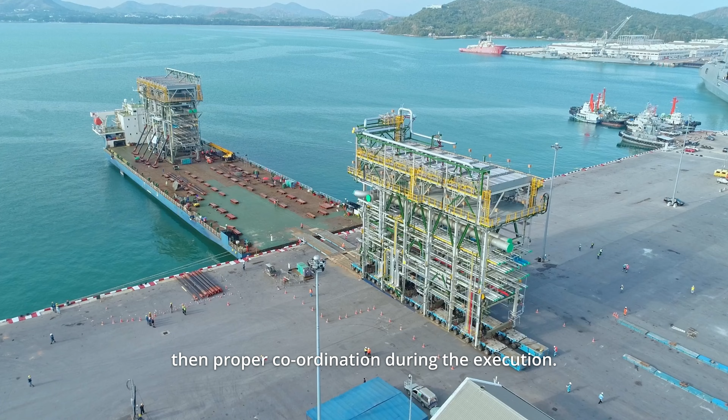Well, the expectations in regard to sea transportation are similar to any other discipline you work with. You are looking for proper planning to ensure smooth execution, then proper coordination during the execution. So we are a family. Everybody knows what they have to do, the scope of work, what to do precisely when the project comes, and then specifically for this project, where to pick up the work from one person to another.

I am Frederic Pagnès, the Managing Director of Dextra Industry Transport, which was created in 1992 in Thailand. At the beginning, we handled small projects such as power plants. Then, when the Thailand economy grew, we entered other sector activities such as petrochemical, sugar mill, paper mill, and so on. Later on, when Thai labor skills reached an international level, Thailand became a major export country.

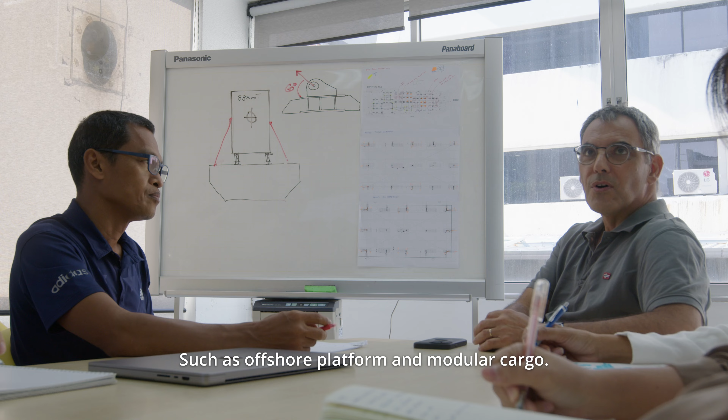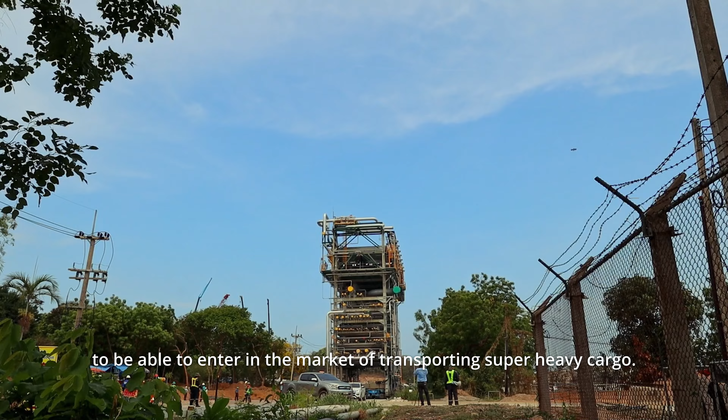Thailand was able to manufacture complicated equipment such as offshore platforms and modular cargo. This is the time that Dextra decided to open its own in-house engineering department to be able to enter the market of transporting super heavy cargo. In 2023, Dextra was acquired by Fracht Group of Switzerland, which has over 150 offices worldwide. Since they didn't have any offices in Thailand and Vietnam, where Dextra is present, it was a good combination.

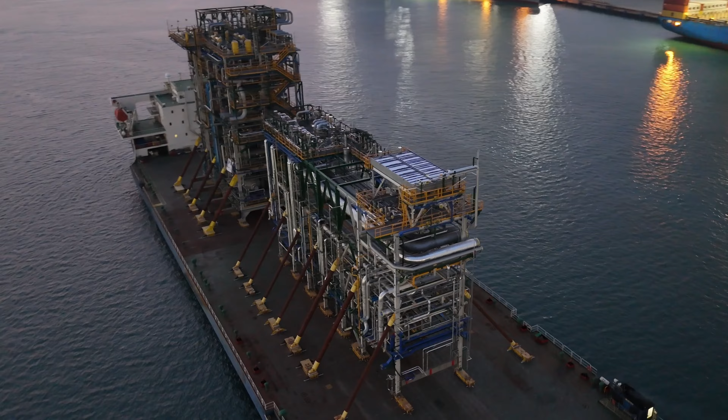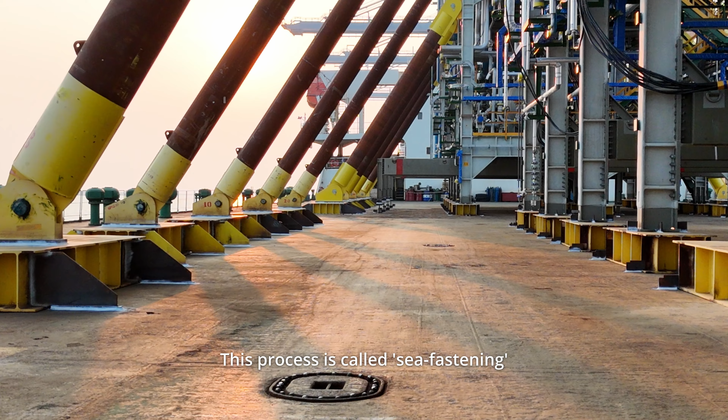For this major project, we had 73 modules to be shipped from Thailand from 2 different yards because the volume was so big that one yard can't fabricate everything. Because we transport them on the vessel, we had to find ways to secure them. This process is called sea fastening. So we had to work almost 1 year in advance before the first shipment.

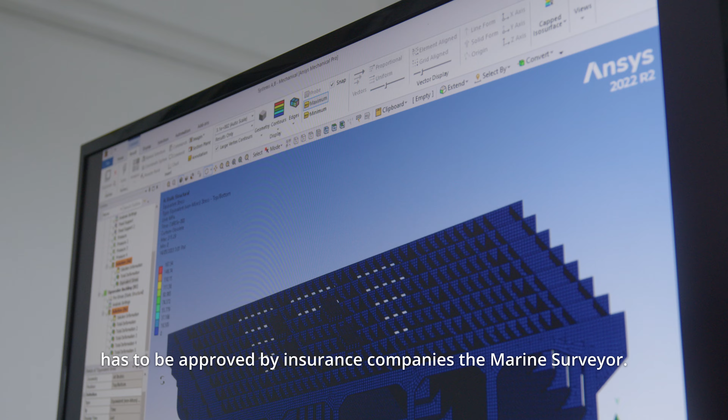There are 3 reasons behind that. The first reason is because the lead time to fabricate such elements is very long. It can take up to 5 to 6 months. So if you include engineering, you're already at around 10 months. The second reason is because everything we engineer has to be approved by insurance companies, the marine warranty surveyor, and also everything we do is as per international standards. So this takes quite some time to get approved.

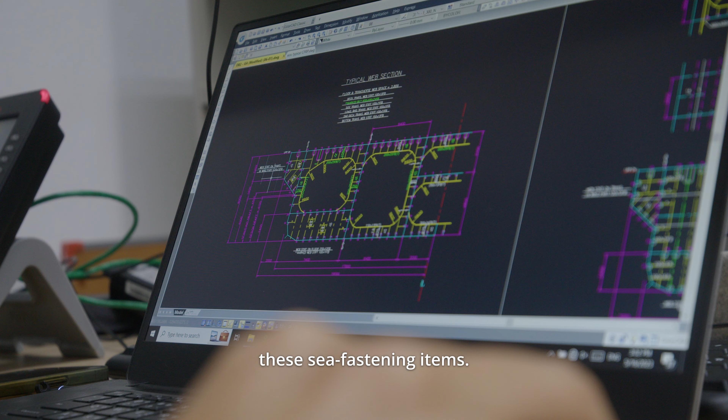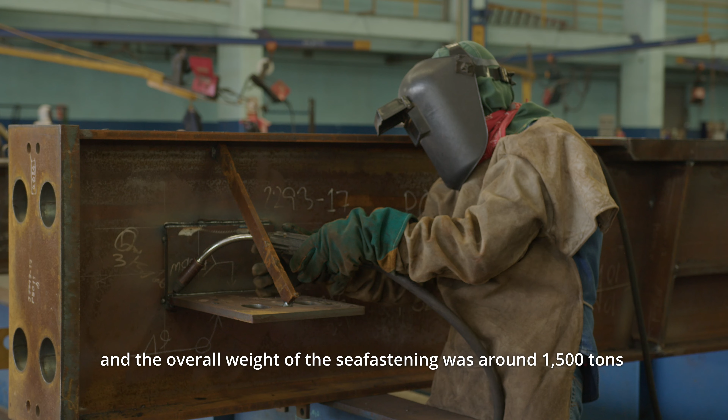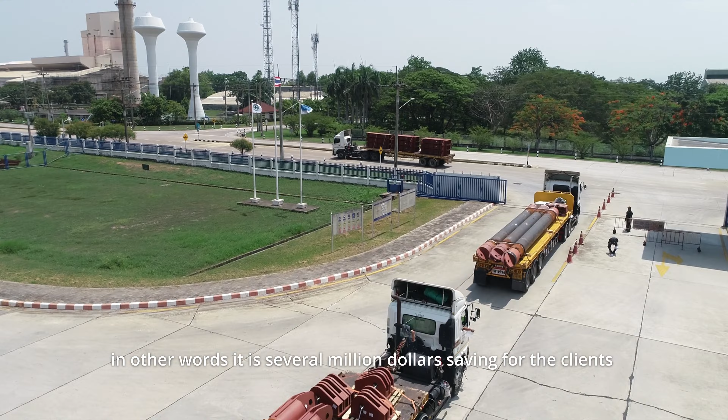And the third one, which is very specific to this project, is as we use one vessel for consecutive shipments between the yards, we had to find a way to reuse these sea fastening items. So we had to find a concept, good ideas, and make our customer very confident and happy with the results. At the end of the day, we managed to pull this off in 3 months, and the overall weight of the sea fastening was around 1,500 tons, which represents around 6% of the total module weight. In other words, it's a several million dollar saving for the client when his budget was 15%, so almost half.

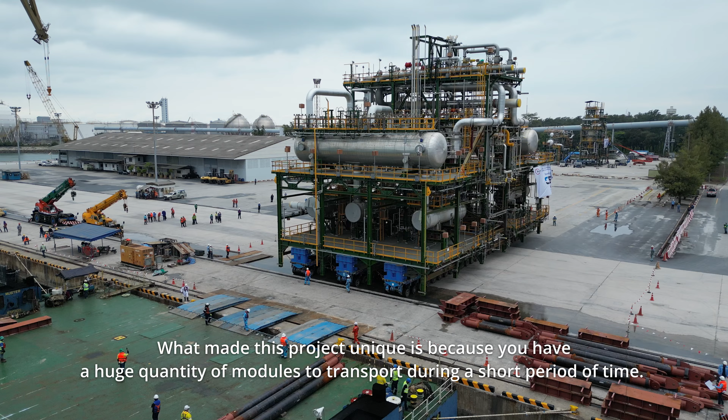What made this project unique is that you have a huge quantity of modules to transport in a short period of time. So we have to have an experienced team, but also an available team to be on the bridge 24/7.

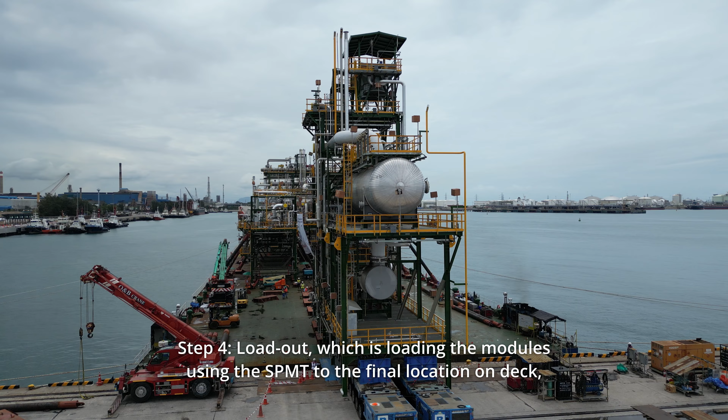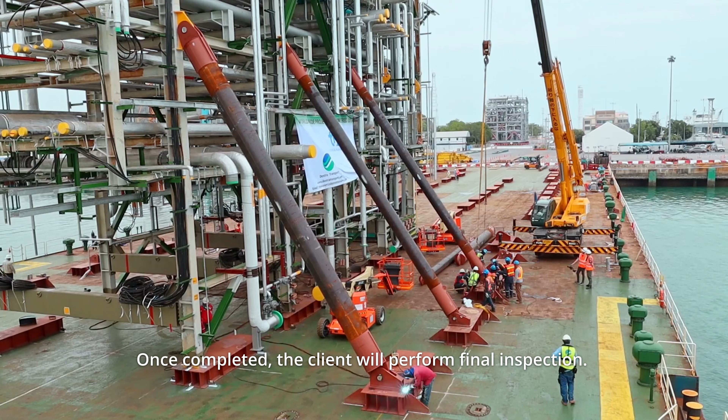There is a direct line of communication between the team members through different channels, which makes everything very effective. As well, the long-term relationship between Dextra and TR makes the team work perfectly coordinated. It is crucial, I will say; the link between the fabrication yard and the final site installation is the sea transportation. So that really puts them on the spot, and it becomes one of the critical items to follow up. In regard to my vision of the future of utilizing logistic services, it is to keep trying to make it better every time by the lessons learned we get through every opportunity we have.

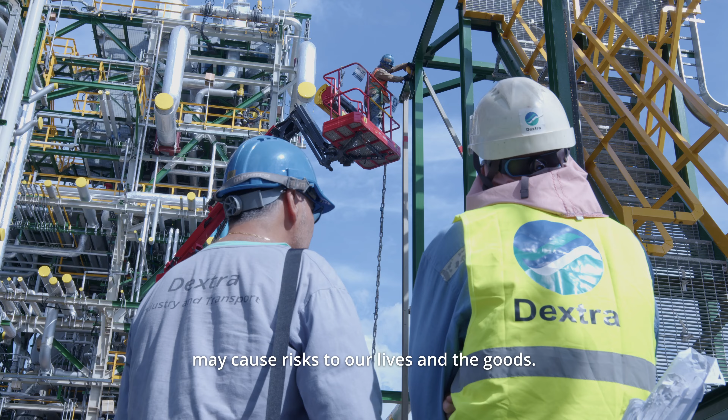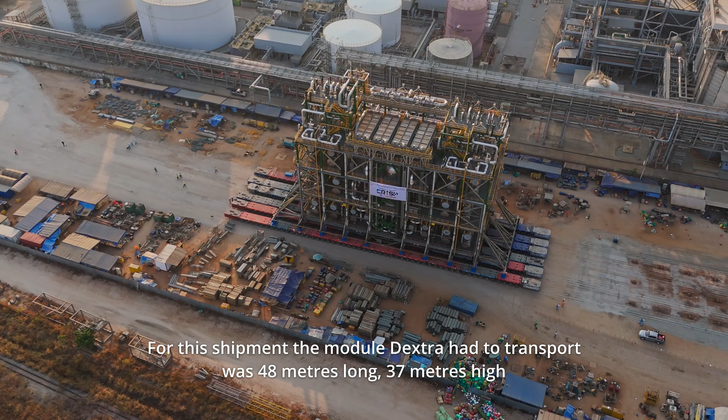For this shipment, the module Dextra had to transport was 48 meters long, 37 meters high, and a final weight of 4,130 tons. Originally, this module was supposed to sit on 24 columns, but we realized that 20% of its weight was only on 4 points, which led to very high forces on the deck during sea transport. For months, our engineers and the Técnicas Reunidas team worked together to find a solution and establish weather criteria to ensure safe transportation of this module and also to make sure that the deck can take the load.

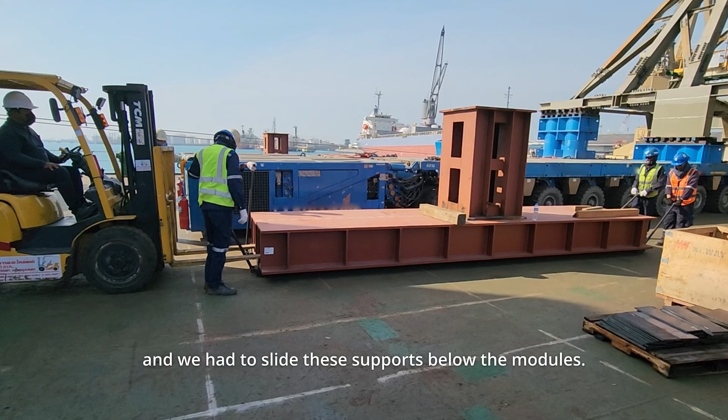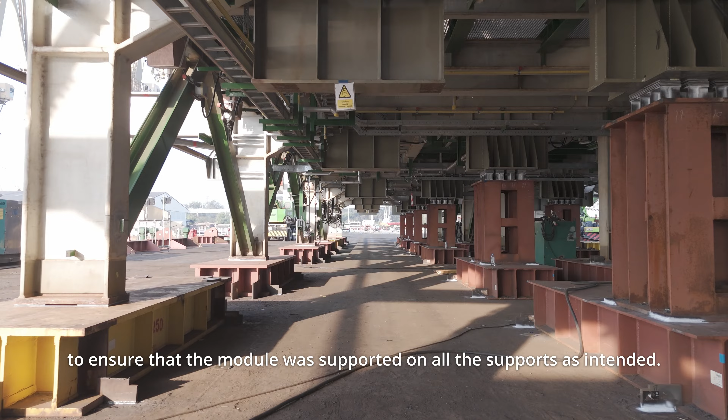We came up with the solution to install 16 supports in addition to the 24 existing ones. The installation of these supports was quite challenging because the module was already sitting on deck and we had to slide these supports below the module. We also developed a step-by-step shimming procedure to ensure that the module was supported on all the supports as intended. Now the bracing and the welding are being done as per our design. Once finished and approved by the Marine Warranty Surveyor, the vessel will be ready to sail and safely deliver its milestone module to its final destination.

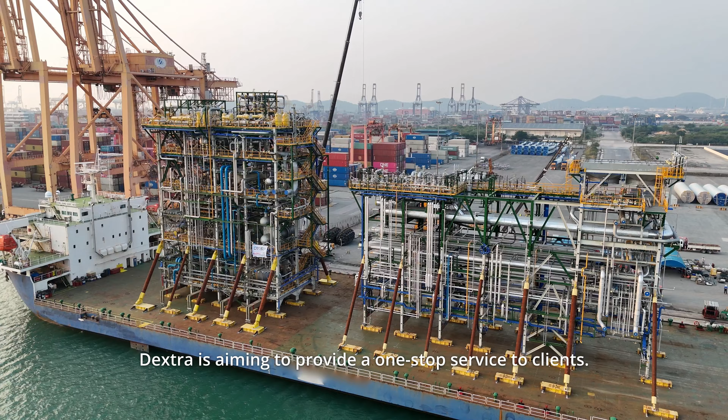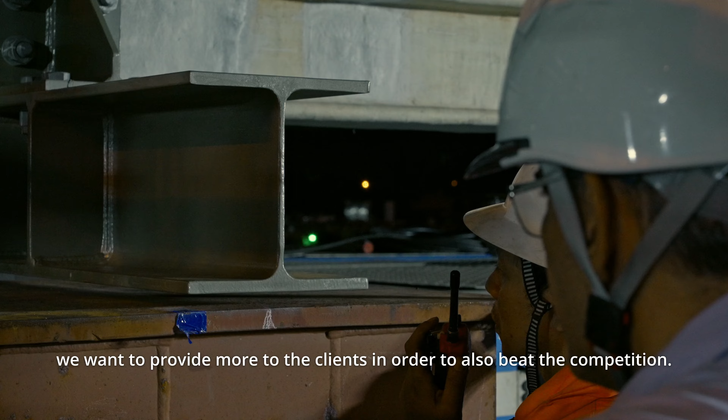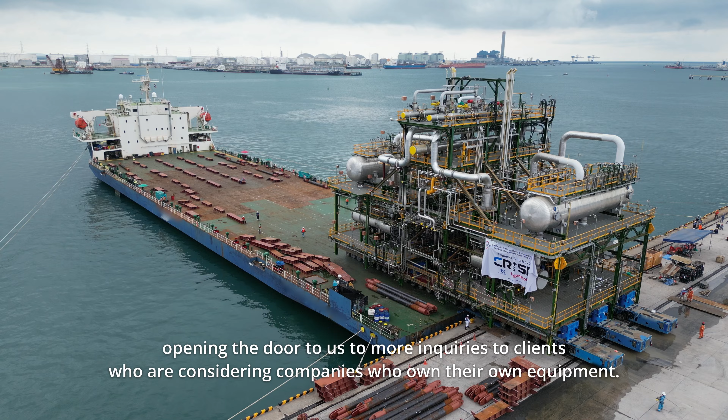Dextra is aiming to provide a one-stop service to clients. This is why we have opened our own in-house engineering department. But we don't want to stop here. We want to provide more to the clients in order to also beat the competition. In order to do so, we have recently acquired SPMTs to also provide the rolling equipment to our clients, opening the door to more inquiries from clients who are considering companies who own their own equipment. This is why we are investing in such equipment now and later on maybe in other types of equipment.

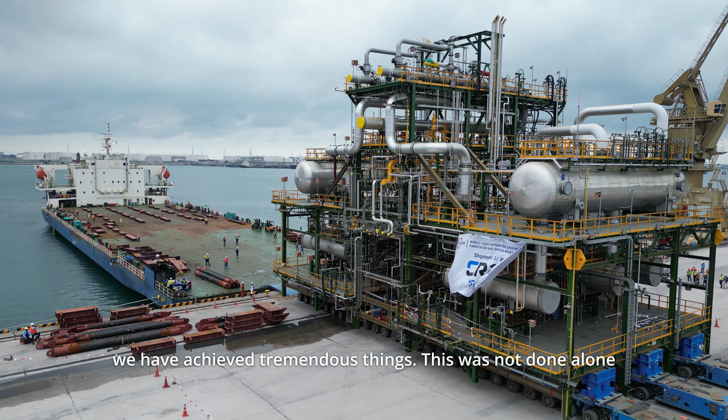When I see Dextra in 1992, when we started with 2 people, and what we are now, we have achieved tremendous things. This was not done alone. This was done with my team. And thanks to this family, we have achieved fantastic things.